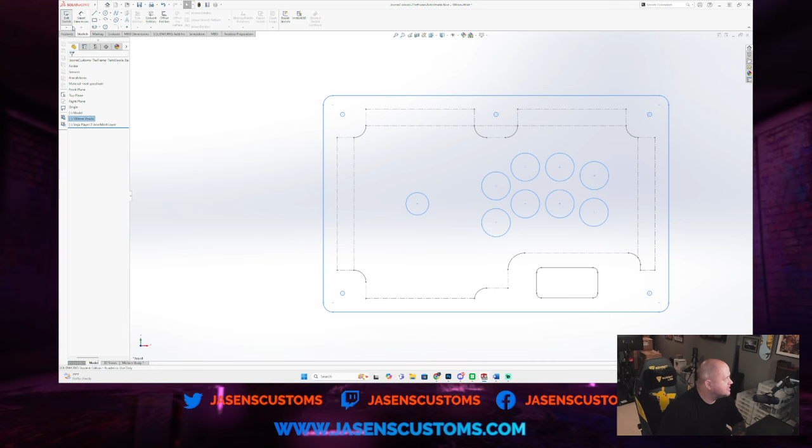And then on the inner plexi, he or they want - I don't know if it's a he or they, I should look at the order and find out - okay, a Korean lever size hole for the joystick, that way if they want to switch to a full color lever, they can and just redo the top plexi.

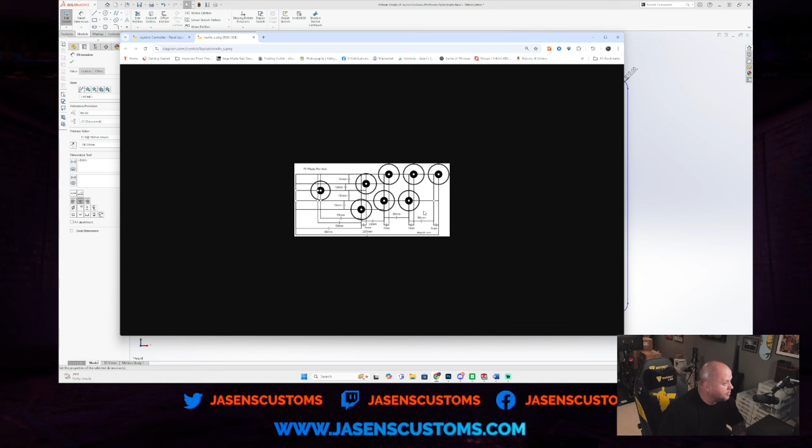That's smart. Japanese standard mounting holes and also the Fanta style holes or the Korean style holes, so 73 and 50, that makes sense. Easy day. And then obviously the same overhang.

On the side panels, all the buttons on either side will be exposed, but the front he wants to close. I think it's Jonathan, right? He wants all the holes on the front covered with the exception of the Neutrik.

Okay, got it. The bottom wants to have a 100 millimeter by 100 millimeter square cutout centered on the joystick, just so there's extra room down there. Got it. And then the bottommost, no modifications.

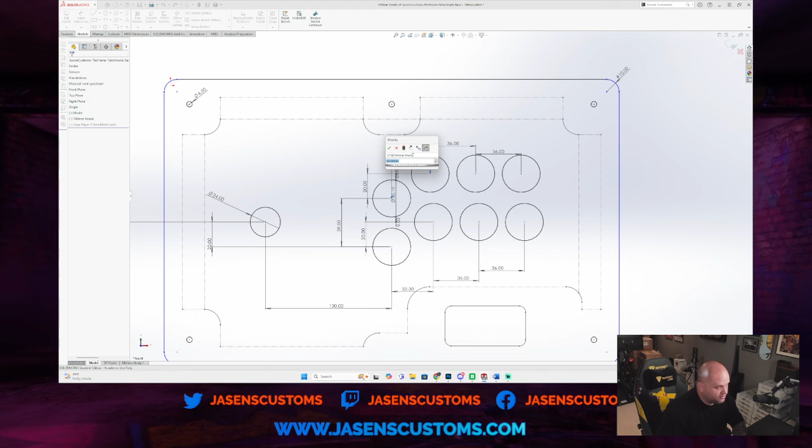And then obviously they want the top and the bottom to be the same size, so the same overhang on left and right and top and bottom. So that's va bene, as they say in Italia. Okay, so let's go ahead and get started.

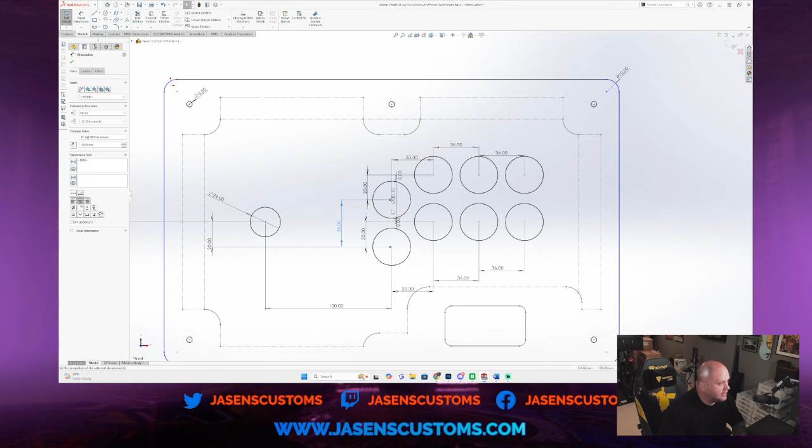We've got our model here in the background, so we've got our safe space turned on. And then let's go here. I've got this set up as Sega Player 2, so let me go ahead and rename this. I'm going to call this 100 millimeter Vewlix.

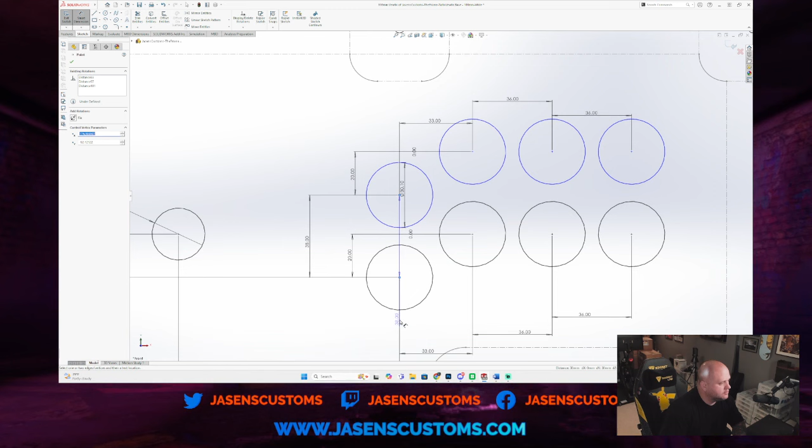All right, and then I'm going to come in here and go sketch. Got it. All right, so first things first, let's change this value to 100. Got it, that looks pretty good. Now we need to actually change all these dimensions on the buttons because this is for Sega Player 2.

We want Taito Vewlix, all right, so let's go ahead to our favorite website, slagcoin.com. Right here you can see the Taito Vewlix layout. They don't put button 8 there, but I know John wants button 8, so I'm going to put it there. This is actually how the Vewlix cabinets are in Japan - at least that's, they've since added the 8th button, but stock design, that's the way they came.

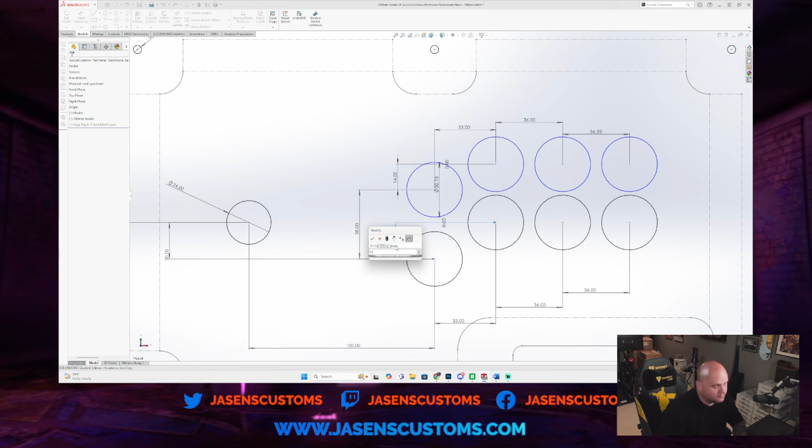All right, so let's go ahead and get this going here. I'm going to zoom in. We know this value here is now 33 millimeters. We know this one is 36, that's good, and we know this one is 36, so let's change that.

All right, we also know that these are in a line, so we're going to take that and set that to 0. We'll do the same thing for the top here, set that to 0. We've got 36, 36, and then up here is also 33. Boom, that looks a lot like Vewlix, right?

And then we know that this value between kick 1 and punch 1 is actually 13 plus 15. Why don't we just do this? This is easier: 13 plus 15 plus 10 should be 38. Boom, just like that. And we know that these buttons

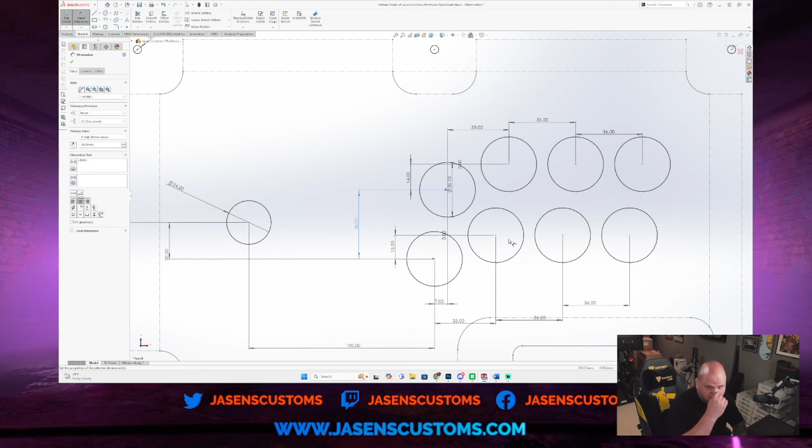are, they're not actually in a line like this - that's weird, right? So if we click this, we take this vertical off. Okay, and then we're going to offset this. It's 7 millimeters. So we got to go here and here.

Crap, how am I going to do this? Let's see, I know what I'll do. I'm going to temporarily put a dimension here to here. Whoops, not an angle dimension. Here to here. Can't do that. Why can't I do that?

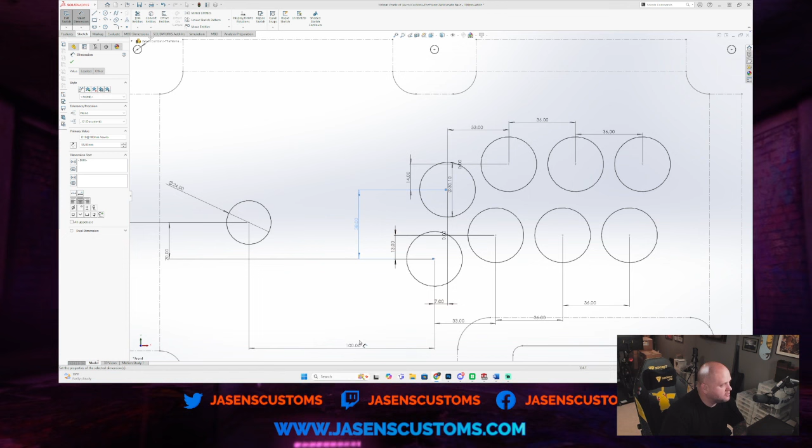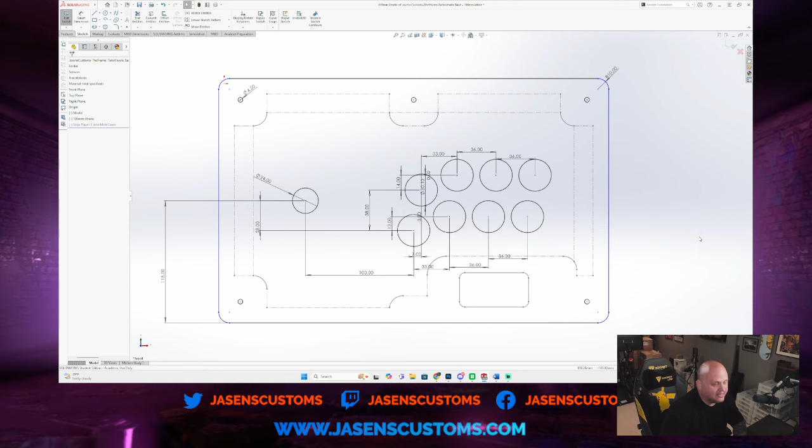Oh, let's change this while we're here, because this is only 14. And then this is also - this is actually only 13. There we go, all right, so 13, yep, and 14, yep. All right, and then why is this? Let's see, what's it saying? It's got...

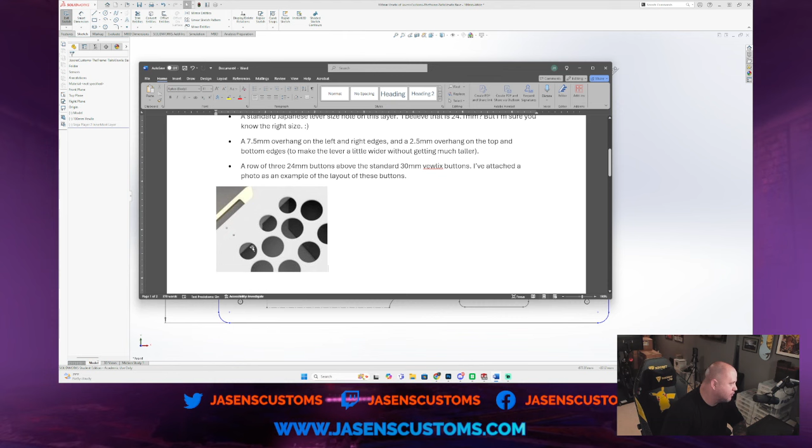Let's see if I can do this again. Okay, there we go. We're going to change this to 107. Hit OK, now that looks right.

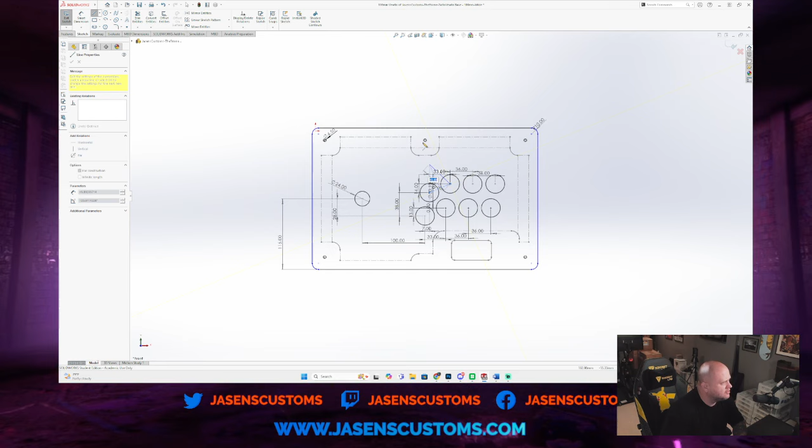Now I'm going to unsmart dimension it and delete it, because I don't want that to be set up that way. I want it to be set up relative to the buttons here, like that. Okay, good. And then I'm going to click here and come here, and I'm going to change that to 38 again. Make that good to go.

All right, let's see what's going on in chat. Oh damn! Yeah, they were originally 7. Sorry, once I get into design mode, I'm like focused. It's an amazing day when I can pay attention to both, and today's not that day.

All right, so let me double check. 13, good. 14, good. 33, 36, 36, 33, 36, 36. I'm pretty happy with that.

Now we got this 100. Now we got to set the distance between the joystick and kick 1. That's actually 15 plus 13, so that's 28. Boom. So that brings the whole setup down a smidge. Let's go ahead and hit yes to that. Now we have our basic layout down, so that's good.

Let's add the additional buttons here. I'm going to bring up the Word document. I'm going to show you what they wanted. So you can see here, this looks like it came off of an ASI case.

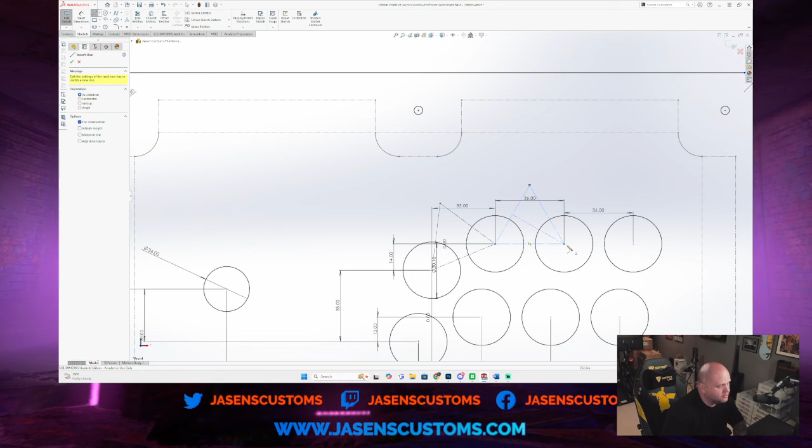So we're going to add this 24 millimeter button here and these two up here. And I'm going to do these like equilateral triangles. So let's go ahead and, how do I want to do this?

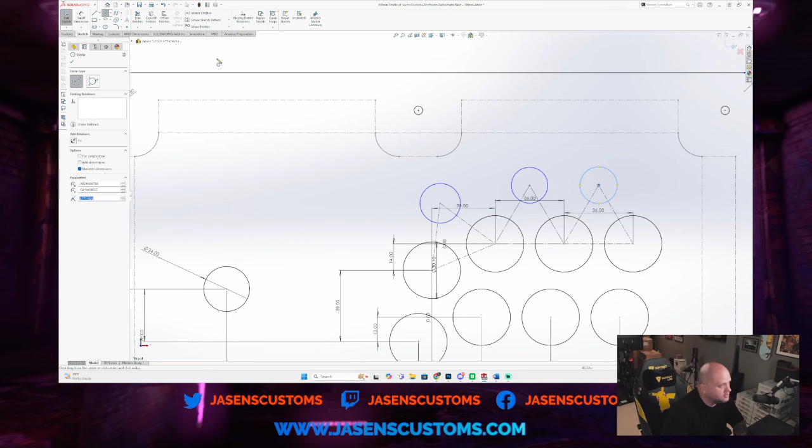I'm going to go here, line, for construction. And I'm going to click here and here. And then, let's see, escape. And then I'm going to click another one. I'm going to do for construction. I'm going to do an angle. I'm going to do 60 degrees, because we know from geometry class, equilateral triangles are 60, 60, 60.

Although that's not going to work, so it's going to be too close. Let me try 30. All right. No, that's too much. All right. Oh, I know what's going on here. Let me just do it the easy way.

For construction, come up here. We're going to just randomly pick a spot. Pick that spot, hit escape. And then this is a fixed distance, so I'm going to click here, and then I'm going to go equal. That should tighten that up. That's good. Now that's an equilateral triangle. Equilateral meaning all the sides are the same.

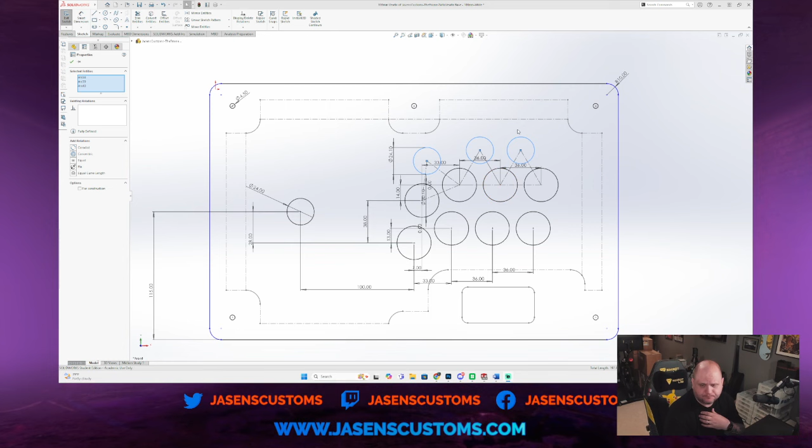Let's do the same thing for here to here to here to here. All right, let me change these also to equal length. And for construction. And then let's draw some more lines. We'll do for construction here. And we're going to go click, click, yep, click, and click.

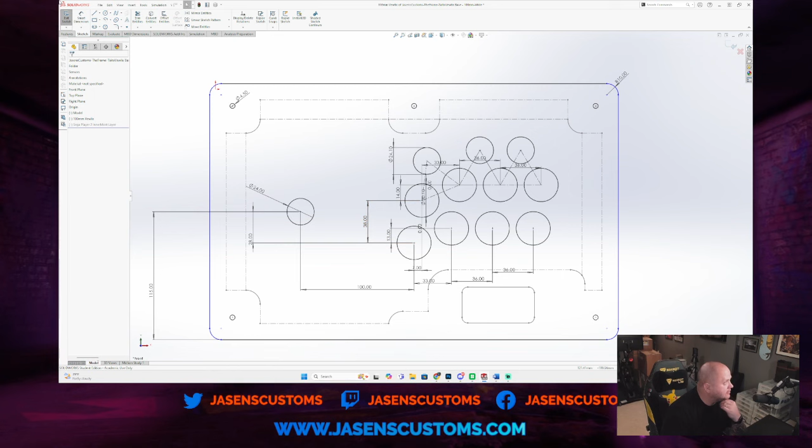Hit escape. Now we're going to highlight all these lines again. We're going to go equal. And that should be good to go. All right, hit check mark. Now we're going to draw some circles here.

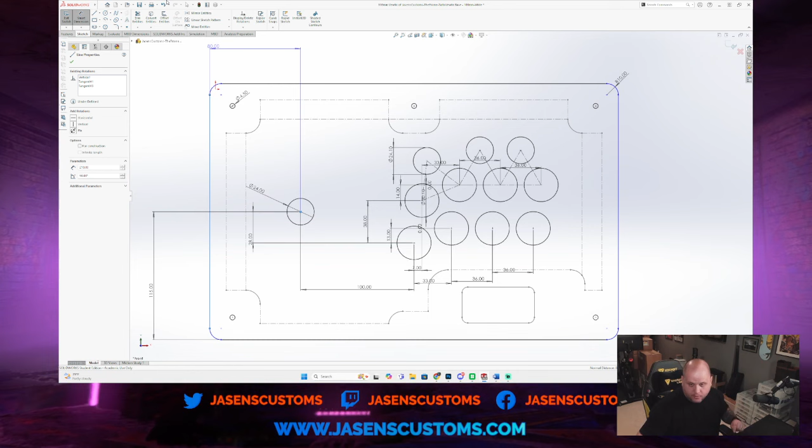I don't think I caught the center. We don't have to be precise yet with the dimensions. We're just going to set them up like this. We'll take the first one. We'll click on it. We're going to make this 24.1. And then we'll hit OK. Then I'm going to select this one, and this one. And then I'm going to hit equals. Now they're all 24 millimeters.

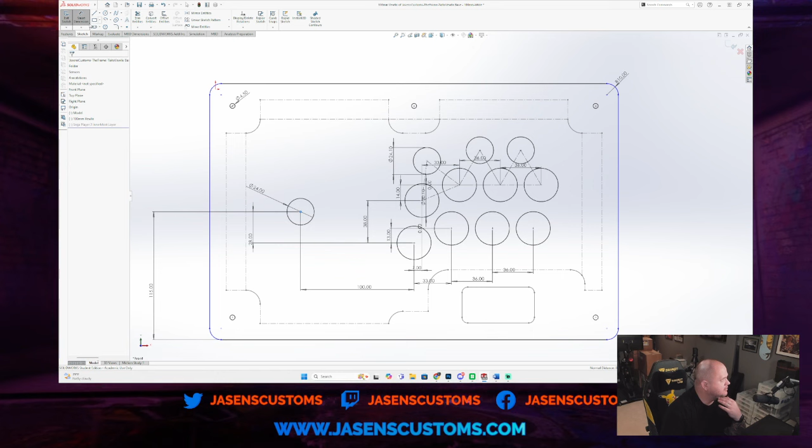Let's look at chat and see what Joe has to say. Or is it Joe? No, John. I think it's John. I should look it up. Correct me, please. Still the wrong thing. Here we go. And yes, I agree. The original spacing can be difficult. All right, Joe. See, I was all over. It's Joseph. It's not even Joe. I'm shortening it. It'd be like someone calling me Jay instead of Jason.

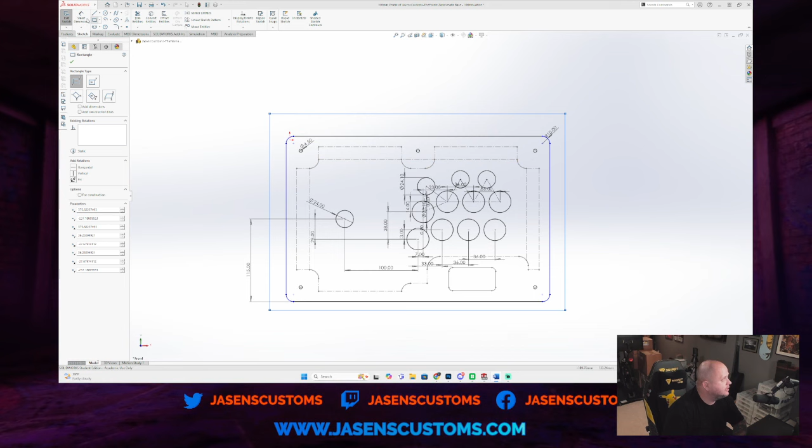Okay. So, how does that layout look? Good? Thumbs up in the chat? That's what you wanted? Great. I love it. Love it.

All right. What I don't love is this. Actually, maybe this is okay. Vertical. Yeah. Actually, that looks pretty good in terms of spacing. It keeps the kick one button centered on the case. And let's see how much space we got over here between the joystick edge. That's 80 millimeters. So let's see. Let me get my calipers out.

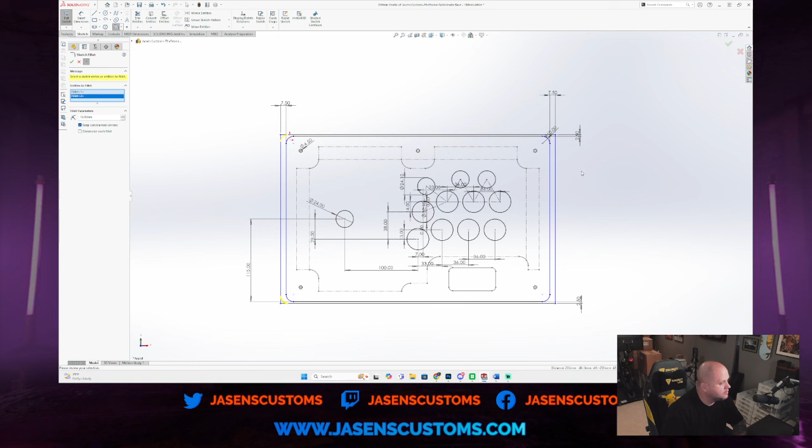We got that much space - iPhone for reference, right? Almost the full iPhone width. So that's a lot of space there. And then we're gonna make it a little bit wider because that's what he wants.

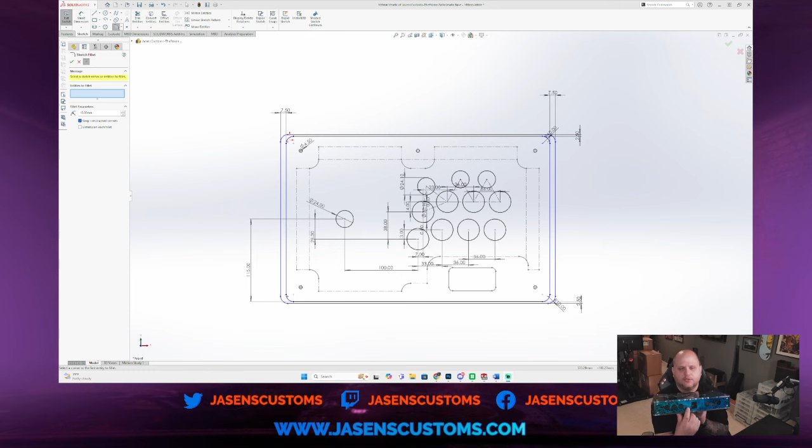Okay, let me see. I think this will be okay with the USB cable. The USB cable sits below, should be below the buttons, and you can orient the pins appropriately. So I think that's good.

Let's go ahead and exit out of this. Oh wait, before we do that, we are now going to take all of this. Oh actually no, I can't do it that way. I'm going to take this, draw a big box around the whole thing.

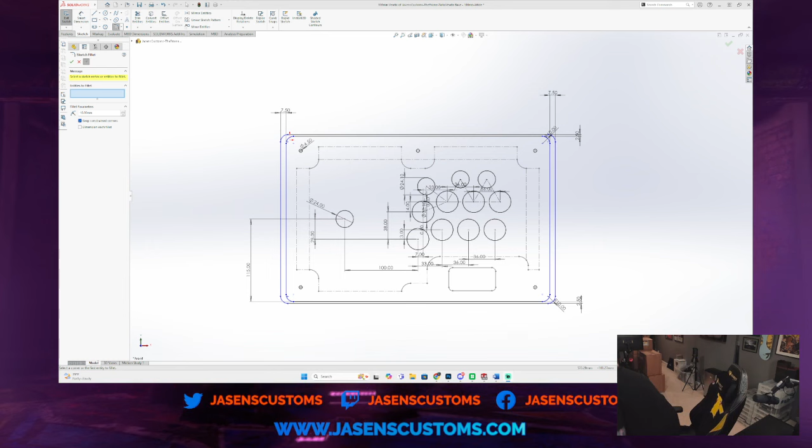Let me consult my notes here - 7.5 on the left and right, and 2.5 on the top. Okay, let's click here and here. No, that's not what I wanted to do. Let me hit the right thing, smart dimension, here and here. I'm going to make this 7.5.

Do the same thing over here. We're going to make this a true ice cream sandwich. We're going to take this, make that 2.5. Same thing here, 2.5. Good.

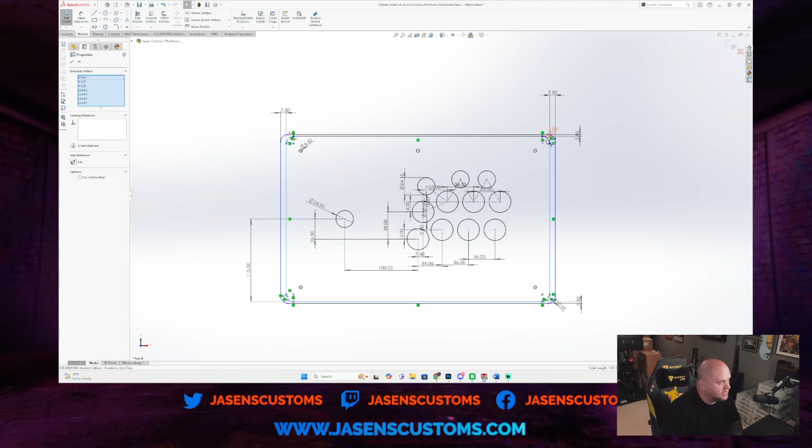Okay, let's add a fillet to the corners here. Like so. And then it's okay. And there you go - that is the basis of the top.

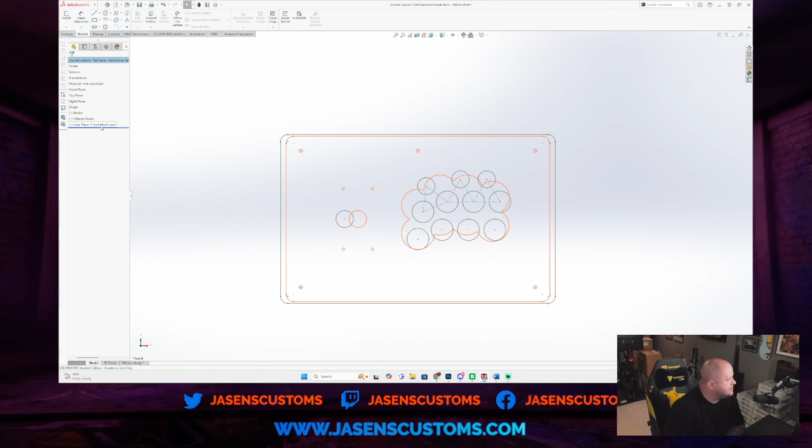Yeah, so on the frame, let me see, do I have one easily nearby? Yeah. So this is the one I'm sending to Brother Bodie. So the USB cable is going to be here in the middle.

And if you use an angled USB connector, it should jut away from it pretty easily. And plus, the button is sitting 7 millimeters - actually 5, 6, about 7 millimeters - higher than the top of the case. So I think that should be fine.

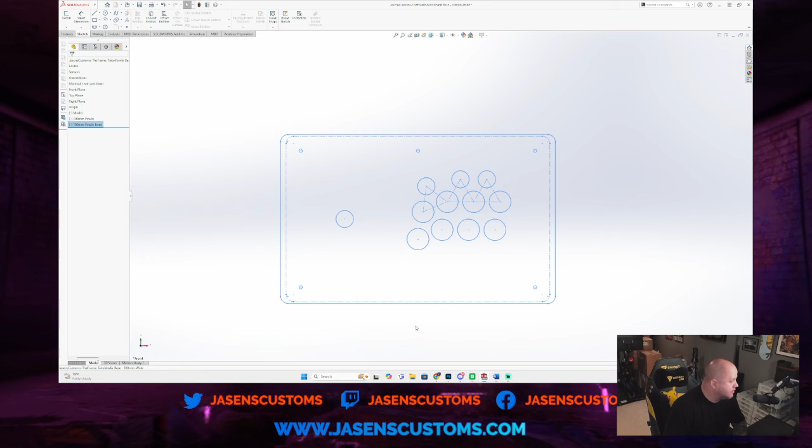As I was looking at this, sitting on my photo table yesterday, I was like, these clear plexis are a great way to rig up some LEDs or something in here so that you turn them on and it's just like the whole base glows and it kind of glows out from the sides. I think that would look pretty cool.

All right, so now we got that done. All right, let me hide the model now. So that's what that looks like.

Let me go in here, and I'm going to take all of this, and I'm going to turn this all to construction so that I remember to delete it later. Dash lines are a good way.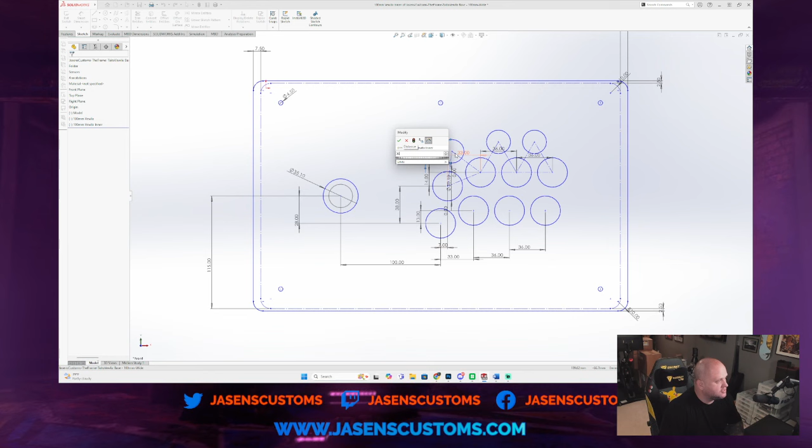Oh, maybe you did. I was just thinking in general. Yeah. Okay, cool. So we're good there? We're good there. All right.

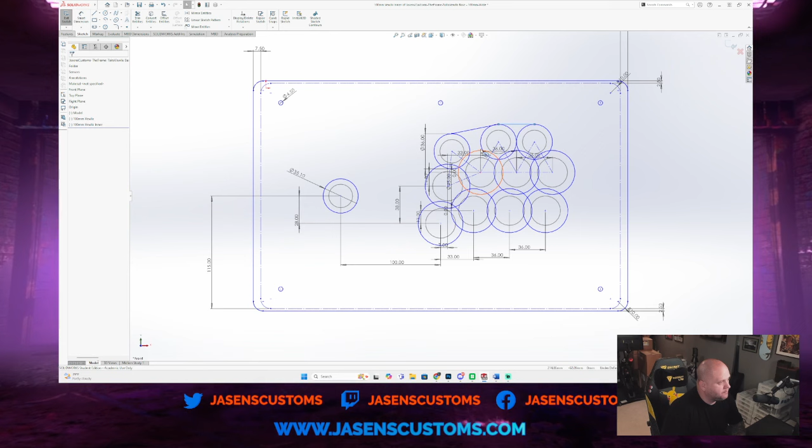Now I'm going to take this one, I'm going to delete it. Yes. And I'm going to take this one, and I am going to Control C, go to my front plane and then paste it. And then we're going to call this, or rename it, 100 millimeter Vewlix inner. All right.

This is where it gets fancy and more complicated. All right, let's see - is this all lined up? Yeah, that's all lined up still. Good, good, good, good. Let me go here.

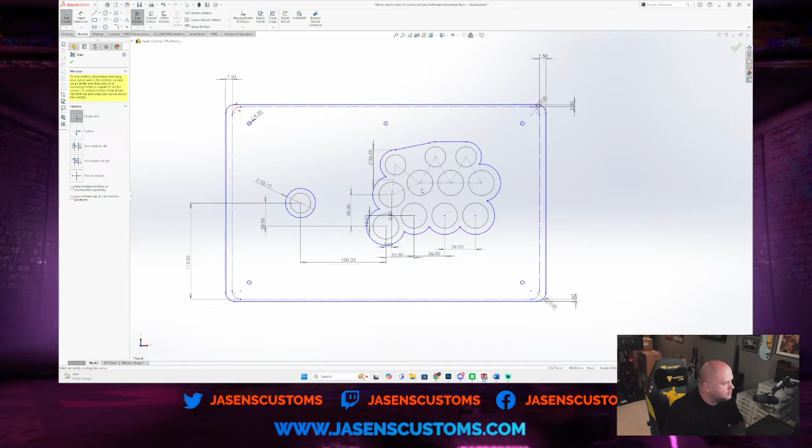I'm going to edit this sketch. And now we're going to take this, we're going to make this 36.1. No, wait, 35.1. 35.1, that's right.

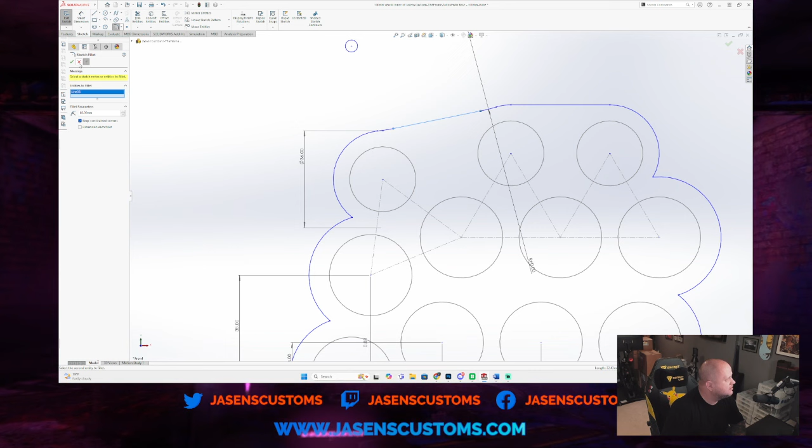Good. All right, and then we'll hit OK there. Then I'm going to make this 36. And then I'm going to make this 45. That should do everybody. Good.

And then I'm going to take a line and I'm going to connect here to here to here. Yep, hit OK, and then escape. And then I'm going to take my power trim. I'm going to zoom way in here.

I'm going to start getting rid of all the lines we don't want, because this is the inner layer. All right, yeah, this is like my most fun part. Get rid of all this. Oh no, I didn't want to get rid of that. Oh yeah, I did.

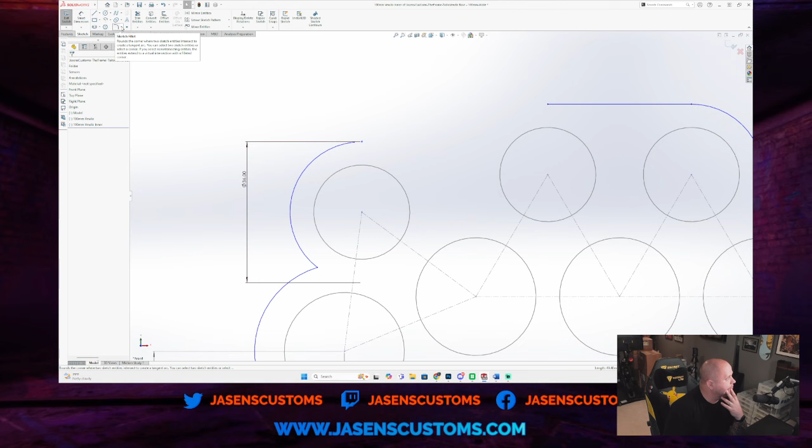Don't worry about this, we're going to make it look a little bit better up here. All right, we'll zoom back in. Okay.

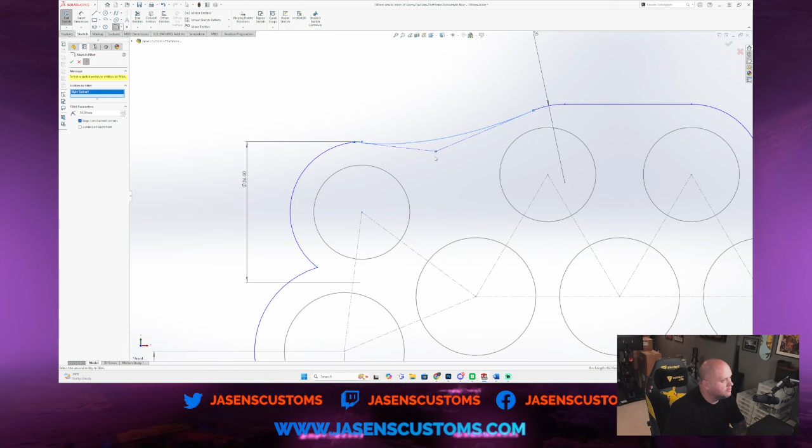Hit OK. I'm going to take this guy, I'm going to add some fillets. Stretch those out like that. It gives it a nice little... I don't like that. Hold on.

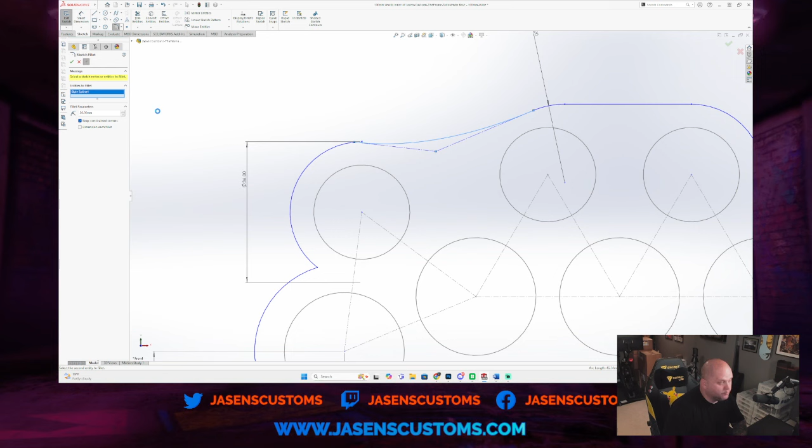I'm going to delete that line. All right, click, delete. Yes, delete. All right. There we go. Hit OK.

Do I want to put a spline there? Nah, I think this will be okay. Yeah, we're going to do a spline. Let's delete this.

All right, I want to have this kind of connect up and have it look a little bit more intentional. Let's see, how do I want to do this?

All right, style spline. Click, click, click. No, all right. There we go. All right, that's still not great.

So let's add some there. Let's turn this to 20. Hit OK. Let's see, click this guy here. We can.

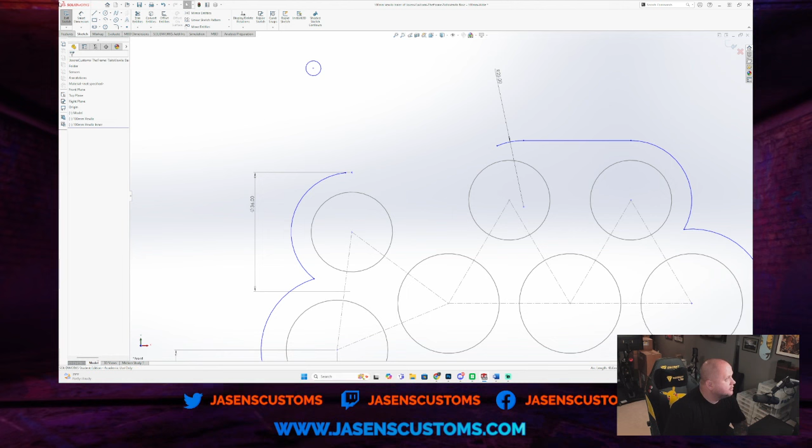All right, let's see here. Don't mind me, I'm trying to do something that I haven't done in a really long time.

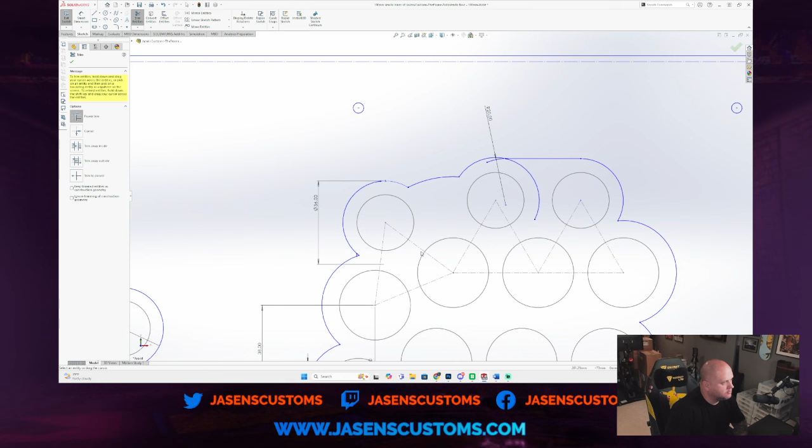There we go. Let's see how that looks. It's still not great, let me go back in here and edit this. You're seeing how the sausage is made in real time. Even though I do this all the time, it's still taking me forever. So let me try here.

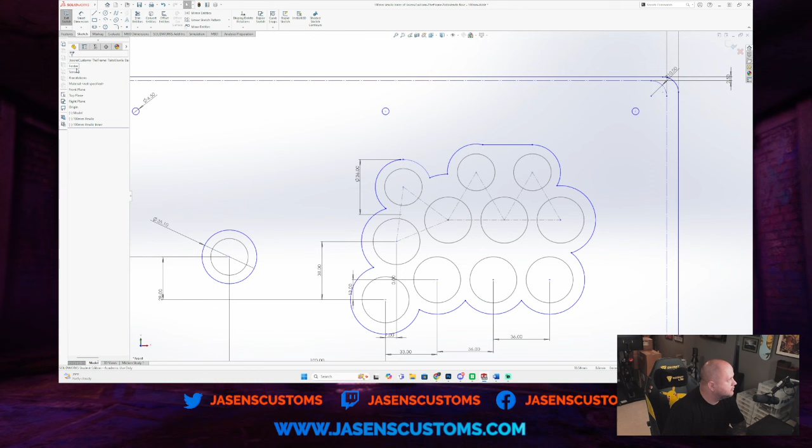All right, no, stop right there. Here we go. No. No. Ugh, all right, don't like that either.

All right, we're gonna go back and let's do this. I'm gonna draw some stuff back in. I know what I'm gonna do. Why didn't I just do this to begin with? Jeez.

All right. Let's... nope, don't like that either. Put all this back. All right, let me...

Yeah, that'll be good. All right, and here we go again. Hold on to your butts. Hey, looks like Mickey Mouse. Don't tell Disney, I'm not getting sued today. Okay, that looks better, I'm happy with that.

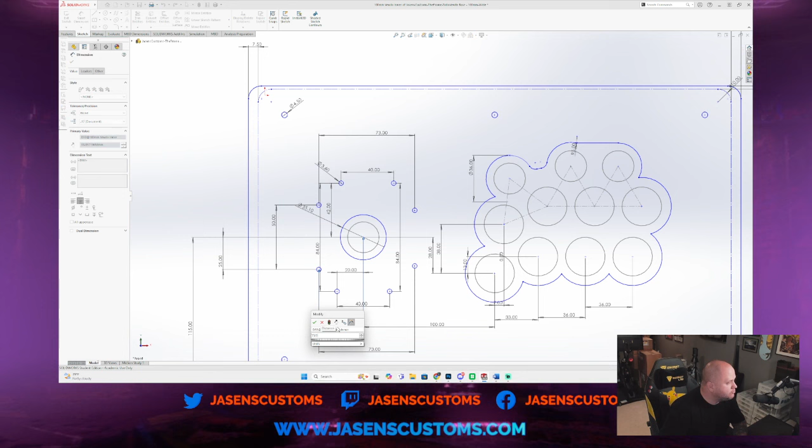That should bring everything together and centered. That's good. All right, let's consult the design guide. Actually, let's just Google number 6-32 screw diameter. It's 3.51 millimeters. So let me take this, I'm going to make these 3.6.

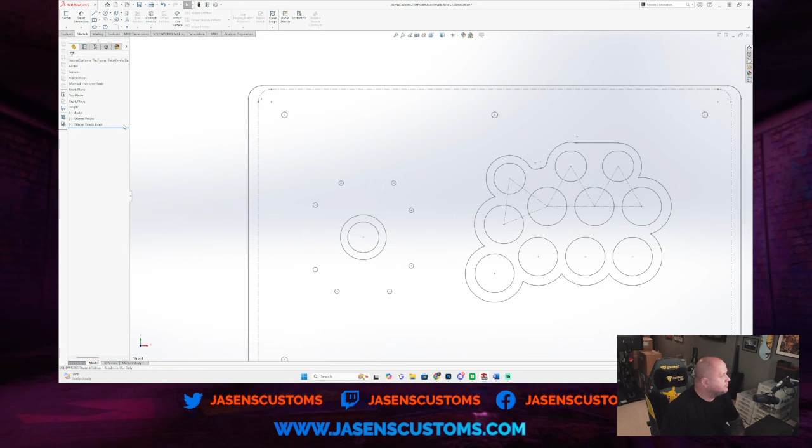Good. And I'm going to take this one, this one, I'm going to make all of these the same. Right. Boom, now they're all the same. That's good. All right.

Move this over here. All right, so 40 and 40. Right, 84, 84, 40, 40. All right, whoops. All right. 20, I'm good with. 42, I'm good with. All right, now Joseph, you said you wanted these to be 73.

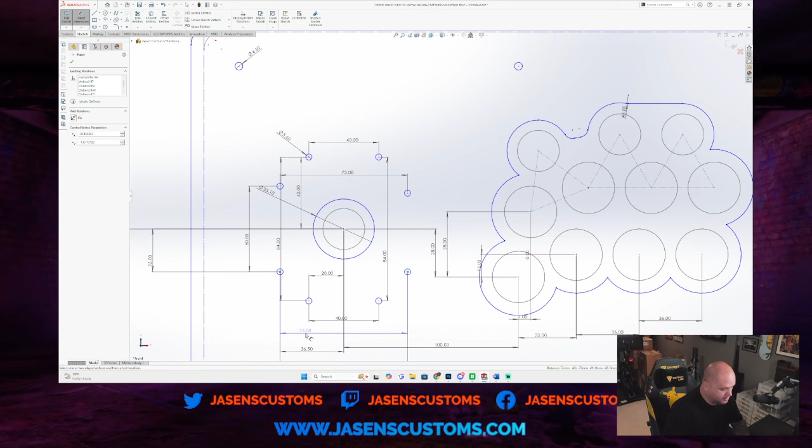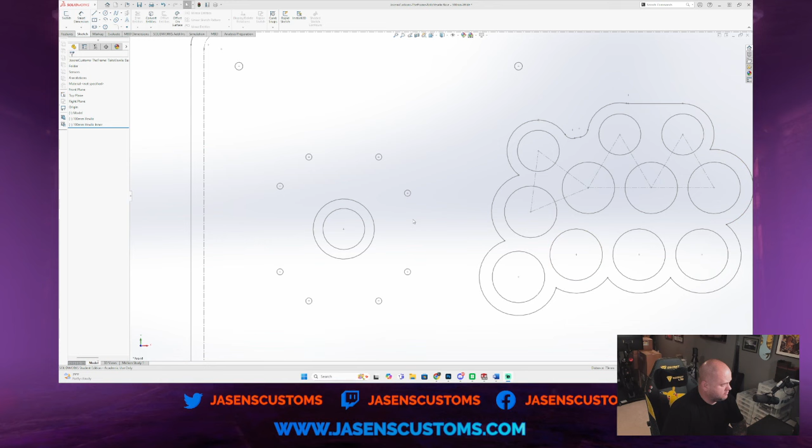All right, so that makes these also 73. All right, and we want these 50. Cool. And then we're going to offset this here by 25. And then we're going to offset this one by 73 divided by 2. And just like that, we should be good. Repair the sketch. Okay, let's hit save.

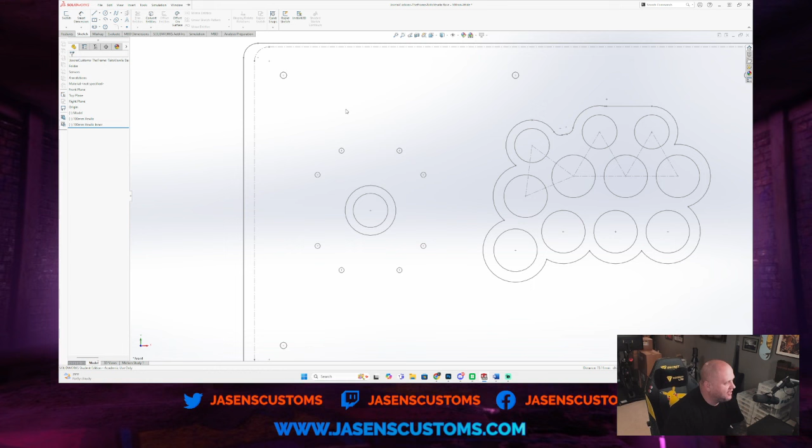Let's exit out. I don't know why it's doing that. That's weird, it doesn't look right. Let's click that guy. I was having the same weird problem the other day, too. All right, let's see.

All right, this guy, okay, and then this guy and this guy should be vertical. Oh, there you go. Okay, then, whoops. Let's see, this guy and this guy should be vertical. This guy and this guy should also be vertical. That should over-define it. Yep.

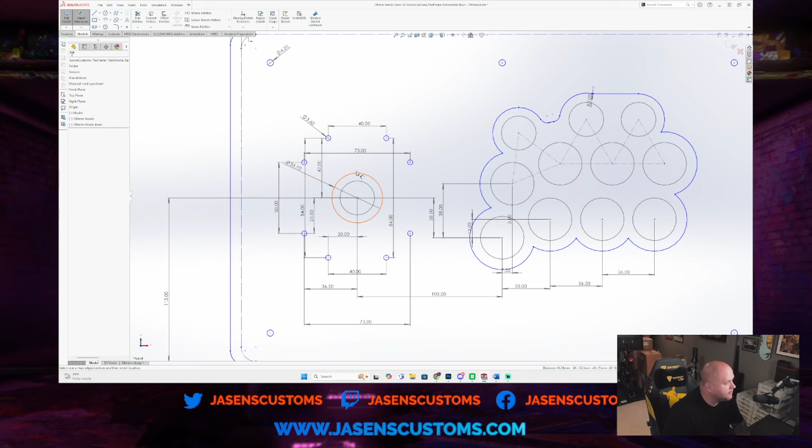And then these should be horizontal. Whoops. Perfect. All right, so 50 here, 73 here. If I just double check and not commit, this will also be 73. Yep. All right, escape, exit. Exit. Hey, look at that.

Yep, that's a good one. I always kind of step back and look at it to make sure, and that's why I was dorking around with the other one. There we go. All right, let's see.

And this is why you pay me to do this, because if I mess it up and cut it, it's on me to fix, not on you. All right, cool. That looks pretty good. Let me go back in and just double check some stuff, because we set this here, good.

This is good. Let me just double check these dimensions. Nope. This dimension, that's good. And then up to here, that's good.

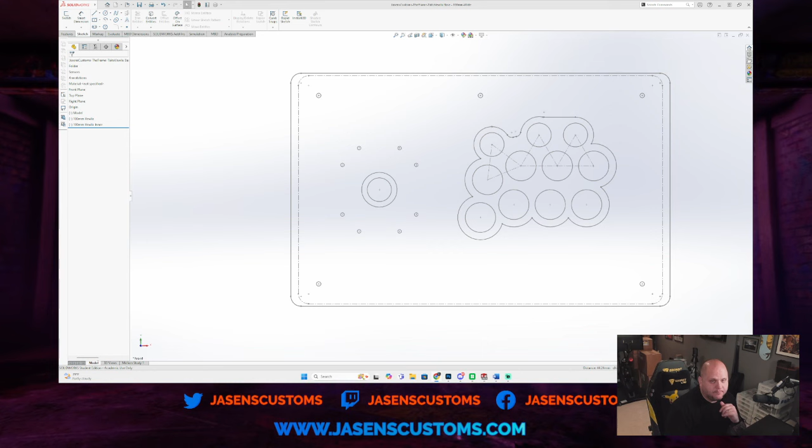Here, that's good. Up to here, that's good. And this way, good. Okay, look at that.

What do we think? Good? It looks pretty good to me. I'm pretty happy with this. I can't complain. I could, but I don't think I need to.

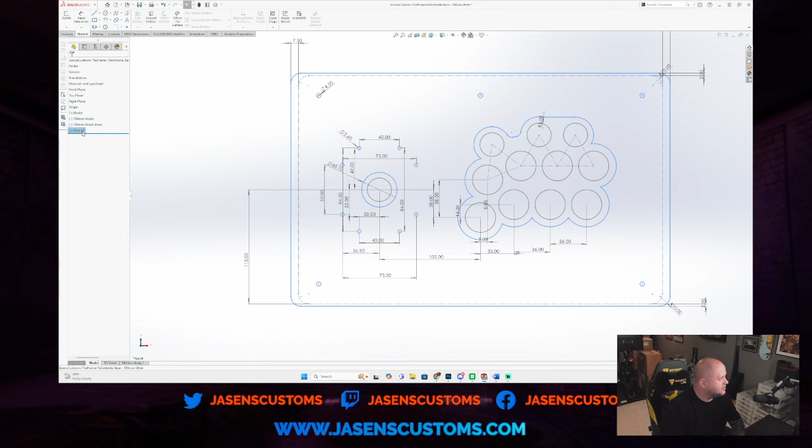Meanwhile, Joseph and I are just sitting here chilling, chatting about his layout, and everyone else is like, what the hell is going on right now? Why am I watching this jackass in SolidWorks? It's because you love the frame and you want to learn how to do this on your own, obviously, and make all of the layouts.

All right. So I'm pretty happy with that. So what we'll do is we'll cut this out of 5.6 millimeter acrylic.

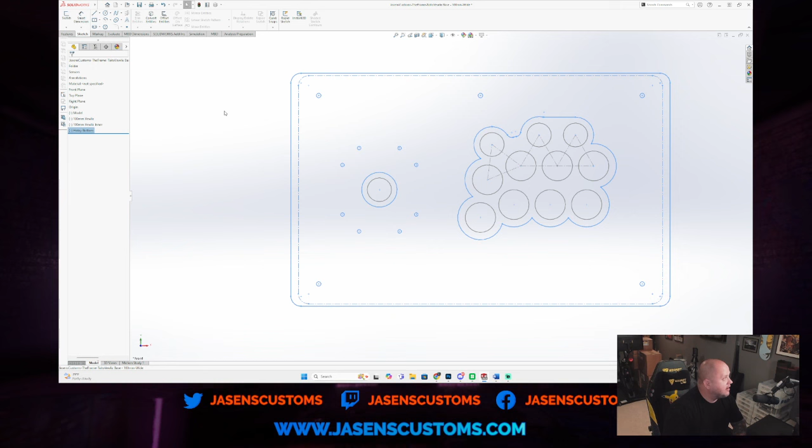And then because Joseph has some requirements for countersinking the top screws all the way, we're going to countersink the M4s here on both the top and the middle layer, so that if the top needs to be countersunk a little too much, the screw has a little bit more to go through, just in case.

Then we're going to countersink all of these with a number 6 countersink bit, which I'm super excited to order from. I think I can get it from Bits and Bits.

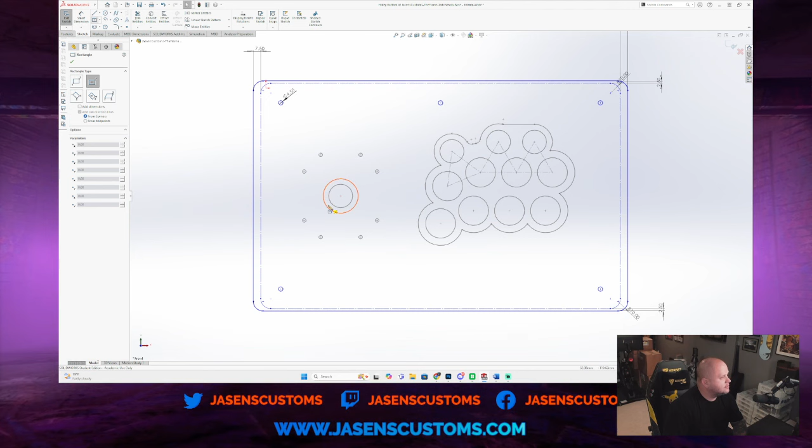I see a lot of YouTubers talking about this place. Now, they sell like CNC stuff, but I think they sell drill bits too.

If not, then I'm probably just going to have to go to Rockler and get something there, which is fine. Oh, yeah, I guess I am going to have to go to Rockler. Either way, that's just down the street from me.

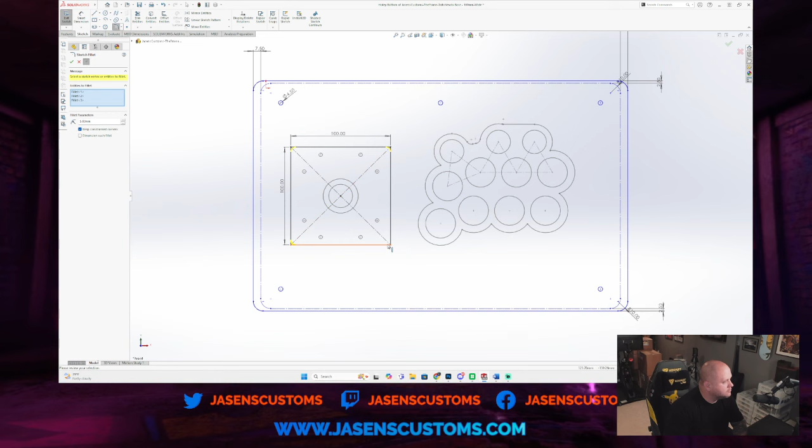So, okay, I'm pretty happy with this. Let me turn the model back on just to make sure, or hover over it. So I'm looking. Everything looks pretty good. Everyone's happy. All right, cool.

Now, let's do this. Let me take this. I'm going to copy this. And then I'm going to go here on my front plate, and I'm going to paste it. And I'm going to call this...

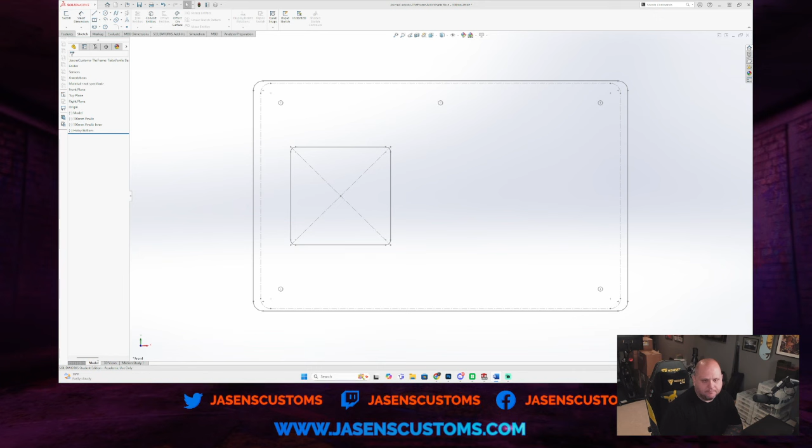Let's see, rename, the Holey Bottom.

I couldn't resist. I'm watching that TV show Kaos right now on Netflix. Love it. And then, of course, my wife went out of town today and said I'm not allowed to watch it without her. So I don't like that.

All right, let's go ahead and edit this. And we're going to delete all of this stuff. You're going to be like, yeah, delete it. It's fine. Yes to all. We're going to delete all of this. You're going to be like, why are you deleting all this? Watch. All right.

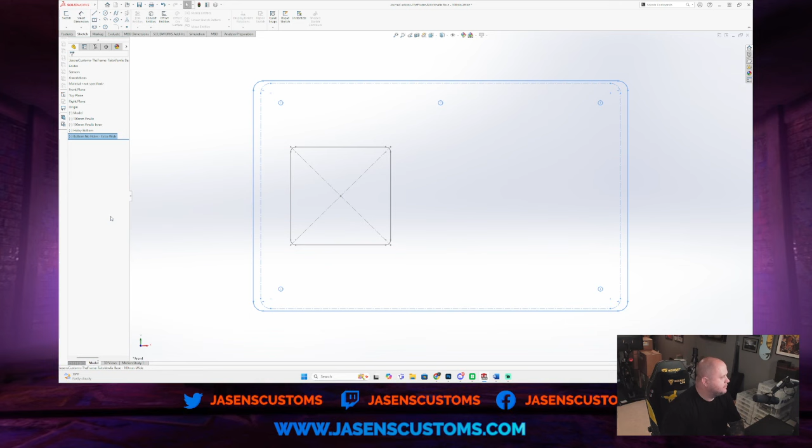Oh, I'll click this little guy here. I'm going to go to the center and draw a big square like this. And then I'm going to add my dimensions. 100. 100. All right. I don't like that.

I'm going to add a small flourish. A little fillet, if you will. Just to make it look a little bit cleaner, nicer. Just a little bit nicer. All right. So that looks pretty good.

All right, let me exit out. And then if I hide all these... that's what the bottom looks like. Easy. Let's double check now.

All right, for the holey bottom. Yeah. All right, we said side panels, no. Bottom, 100 millimeter by 100 millimeter square hole centered on the joystick. Done. Bottom plexi, no modifications.

That's fine. We can take this and copy it, paste it, edit it, delete this.

Exit, rename this, standard, bottom, no holes.

Extra wide, I guess. All right, so then we can turn this on, then we can turn this one on, then...

We can turn this one on, and then we can turn this one on. And just like that, you see how all of these stack up. It's pretty sweet. Yeah.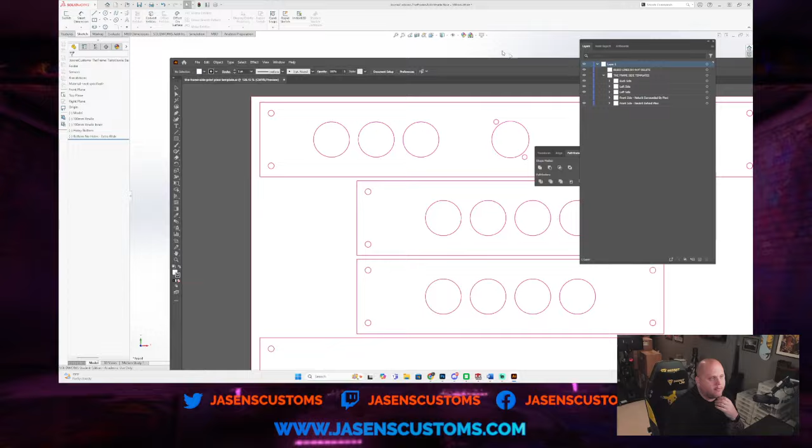If you post this on Discord, the square should be large enough to fit the shuriken board and the 5-pin wire. Cool. I'm trusting your measurements on this because I don't have one of those boards.

I personally don't need one. I'm not opposed to wiring things up. Plus, with the Panzer V, I include both the types of harnesses. Cheap, easy.

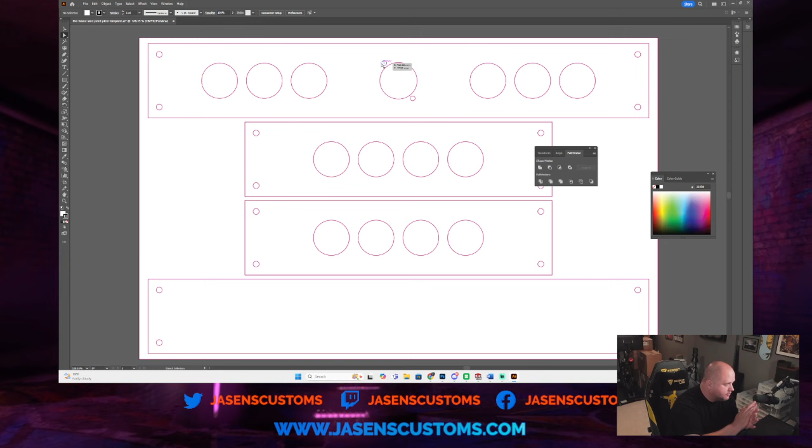Okay. All right, let me see. Now we sit back and we kind of do this for a minute. And we look at it. And we say, do we like this? Is this done? Well, I think it is. Yes, I'm happy. You're happy. Perfect.

And I don't have to do the front because, let me show you. I'm going to pull it up because I have an Illustrator.

Open faster. There we go. All right. Open. Because I'm not going to do this in CAD. Don't need to. Look at this.

I got you. So check this out. We got two options for the front. We got this one with the square cutout. We're not going to do this one because here's why: this relies on these buttons here to help press the plexi in place and keep it squished.

Because we're going to delete all these for you, which we'll do... actually, we're not going to do it on that one. We're not covering that one. We're going to do this one. This will sit in front of the USB, so it's going to kind of look like it's sunk in a little bit. And these two screws here, number 4-40, you'll use button tops. These two will help keep everything in place. So we're going to delete this, and that's how we're going to do that one. Easy, simple, perfect, and we'll leave these here.

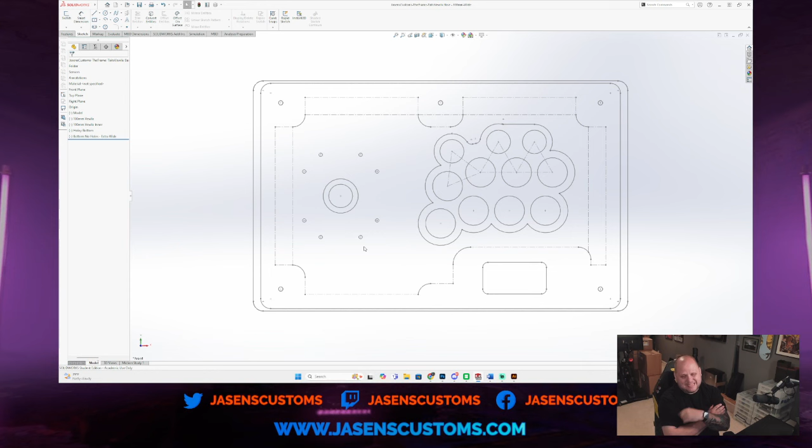Please? Here's what I think I'm going to do. I've been thinking about this for a while, because anytime everyone sends me the Photoshop files, that's fine, it's great, but it's just an extra step when I go to create the printed Plexi file. I have to place the artwork from Photoshop into my Illustrator file. I've got to open the thing in Photoshop, then put the template on it for the cut lines, get it all lined up. Then I got to go over to Photoshop, turn all the cut lines off, save it, wait for everything to load.

It's done. Update, save, rasterize as CMYK 600 DPI, and then done. It's like an extra 5 or 6 minutes per file, and I think last month we had 15 files, so it's an extra hour and 10 minutes, I guess, to do all that.

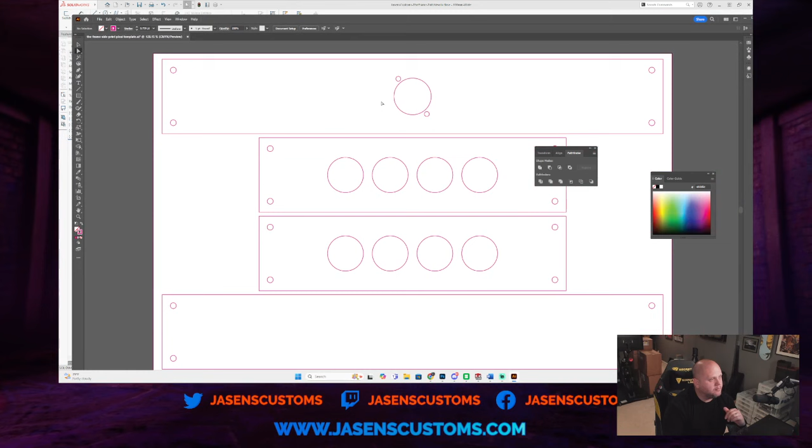So I'm thinking, and I'm not sure how to do this on my shop, but I'm thinking I'm going to have a thing where you will submit all your artwork as an AI file in accordance with the video, and take $5 off the price of printed Plexi, so that if it saves me some time, I can save you some money. That's the goal. We'll see. I'm not sure if I can actually do that in the shop, or if I'll have to do it as like, I'm going to submit a PSD file and it just adds $5. We'll see. I'm not sure.

But that's the thing that drives me crazy, because you'd think as I get these files, I'd just kind of get things up to date over time, like, oh, I got an order, let me just get it on the print file. Well, more often than not, people will submit something, and because we leave the window open for 30 days, 15 days will go by and I'll be like, oh, I changed my artwork, can you use this one instead?

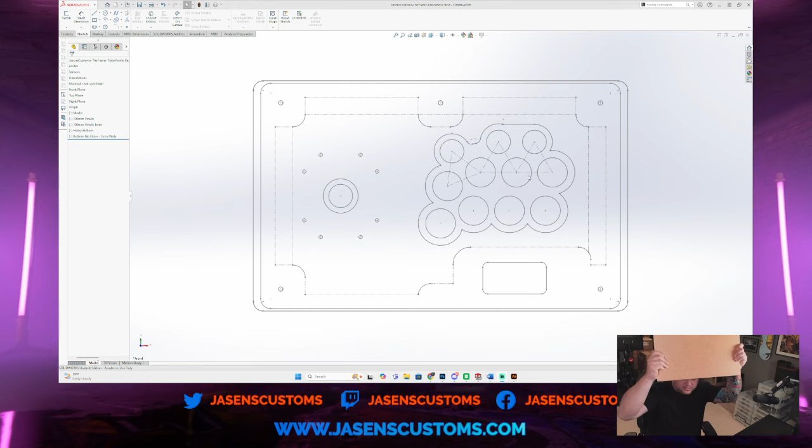So I wait until like the day before I'm gonna actually start processing the print to lay it all out and do everything, so that I can minimize extra work for myself. There's some back of the napkin inside baseball of how JasensCustoms works.

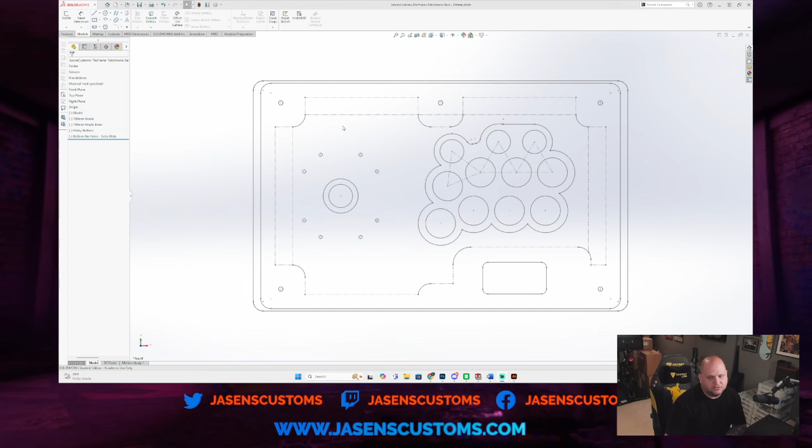So anyways, that's what we did today. Just to recap, Space, in the chat - this is his layout. It's a Vewlix layout. It is widened to be 100 millimeters between the center of the joystick and this kick 1 button. Normally Vewlix is only 59 millimeters - that's just because of the cabinet. We've added these 3 additional buttons up here for him.

On the inner side of the Plexi, we've got both a Sanwa JLF mount as well as a Korean 73 by 50 millimeter mount. We're going to countersink all these after we cut them. We did modify the front panel here for them so that there's no buttons - there are buttons on the side. That'll be pretty cool, I guess. And we did make the Plexi just a little bit wider, just to give them some extra room.

Now, we can do a lot of crazy stuff with this. Because this was such a small change, no additional charge, because it's not really changing how much my laser is running. But if you do anything crazy with your layouts, I'm happy to cut it, 100%.

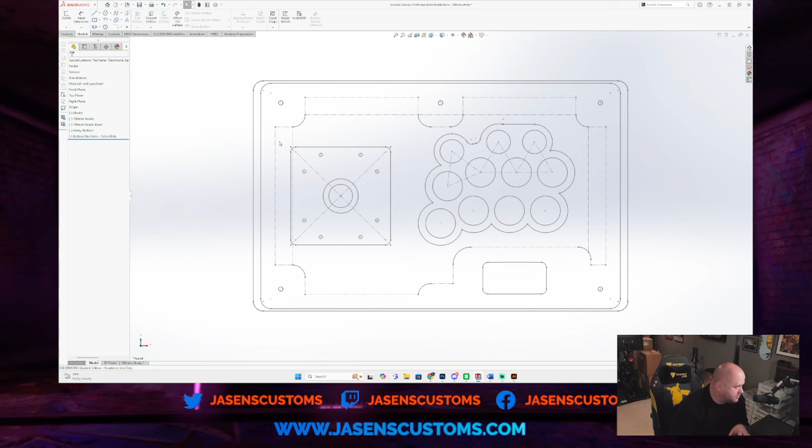It just got to be within 12 inches by 18 inches - I think that's how big my little plexi blanks are. Let me double check. Yeah, as long as it's within 12 inches by 18 inches, you're good. I mean, if you made it this big, that would be crazy - this is huge, don't do that. Plus, I can't, it would just be too big.

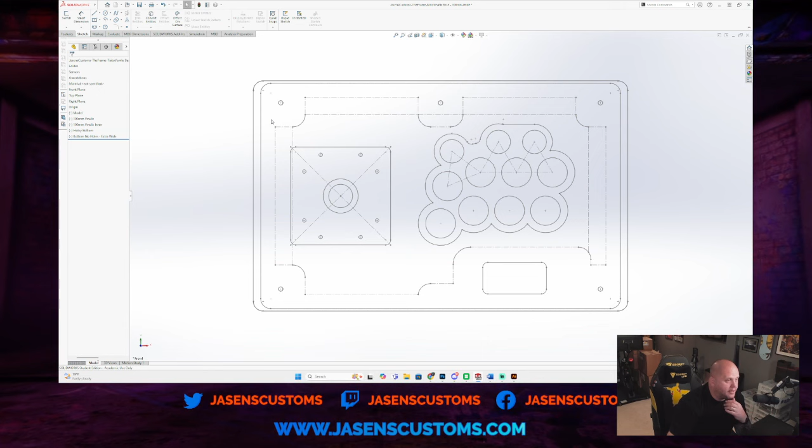Yeah, so there's some really cool stuff you can do with this. I think that at some point in the future I'm going to make one where I extend out both sides and just cut long hot dog shapes in it, and use those like as carrying handles maybe. And I may set it up to do some 3D printed spacers, supports that can go in the middle maybe. That'd be pretty cool.

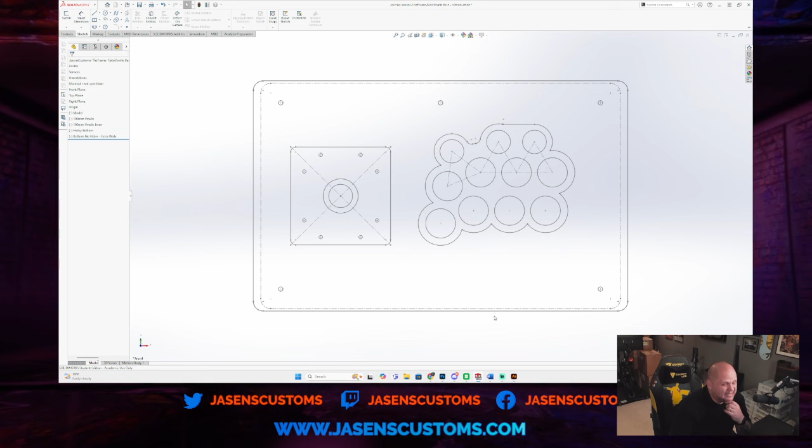So, yeah, other than that, let's see, what else did we do on this? We created the holey bottom. We put a 100 millimeter square in the bottom 5 millimeter plexi so that the lever, if ever it needs to be, there's some extra space. That's cool. And then the bottom is just a standard bottom, and he's going to wrap this all in printed plexi.

So from here, what I'm going to do is I'm going to export all these as DXF files. I'm going to import them into Illustrator, make templates for the top and the bottom, as well as the sides. I'm also going to create Photoshop templates for the top and the bottom. And then I'm going to zip all this up, and I think I'm going to post them up to Discord.

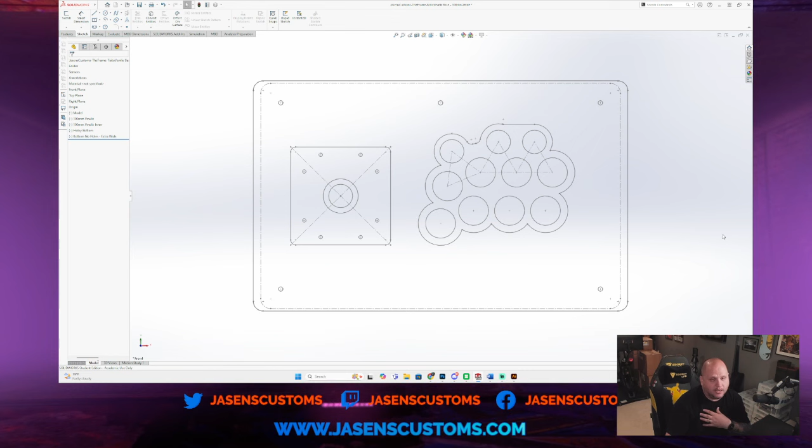Now I need some recommendations. Discord's fine, but not everyone has it, and not everyone wants to use it. So my thought - what if we did a GitHub of the frame layouts? The goal would be you can create your own folder, post your DXF, AI, and PSD files, as well as a picture of the whole layout. Then other people can just download them and submit them for processing, or take them and modify them. I don't know, let me know your thoughts. A lot of people get put off by GitHub because it's weird - it's not something normal, but it can be pretty drag and drop. So let me know, I'll pose the question in my Discord as well, because I'm not sure about it.

So with that being said, I think that's it for this stream.

It is almost 6 o'clock, and I am going to go make myself dinner. My wife's out of town - she's in Texas, so I get to eat dinner without vegetables tonight. Hoo-yah, I'm very excited about that. Steak and scallops, yeah, on the barbecue. Should be good.